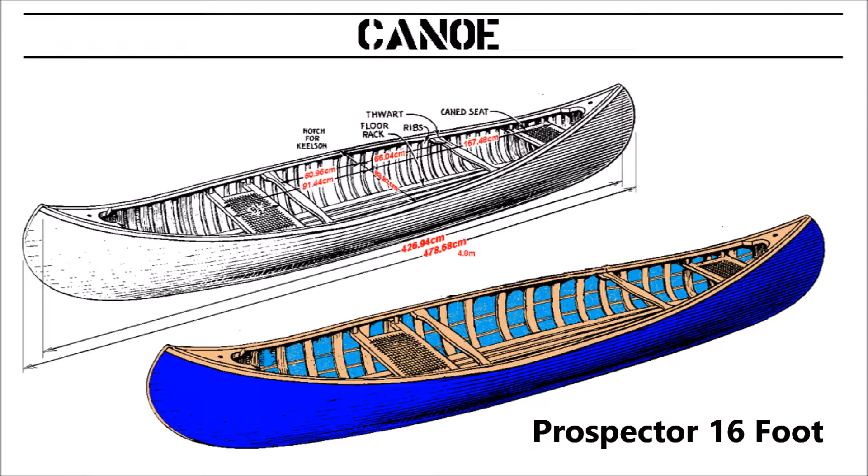So here we can see a drawing of the style of canoe I'll be building. It is known as a prospector style canoe, 16 foot long, and there are various types of canoe that you can build, and this is known as a skin on frame canoe, which means that a fabric is stretched over a wooden frame to form the hull.

So in building a canoe like this, the first thing that we need to be concerned with is the mould on which we build the canoe. And the canoe is built upside down on this mould, and we can see in this picture here a diagram of what a canoe mould looks like.

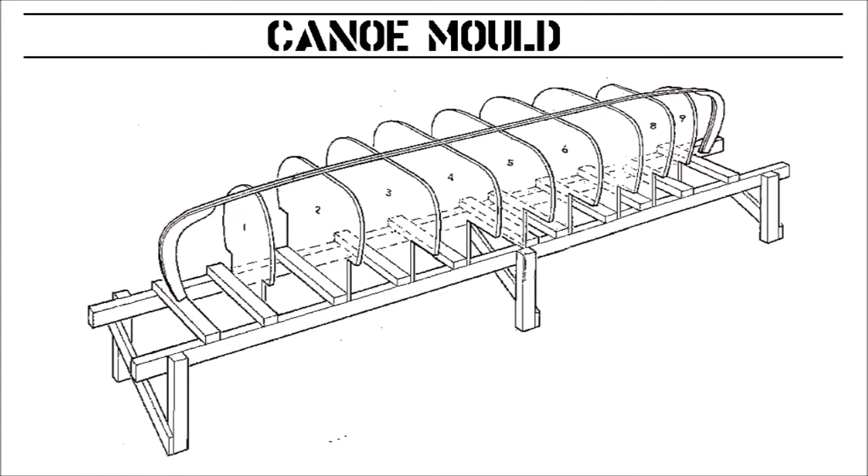If we take the stand that the mould sits on away, the most basic form of mould used to build a canoe looks just like this. The base of the mould is a long flat plank which we call a strongback, and this forms the straight rigid spine of the mould.

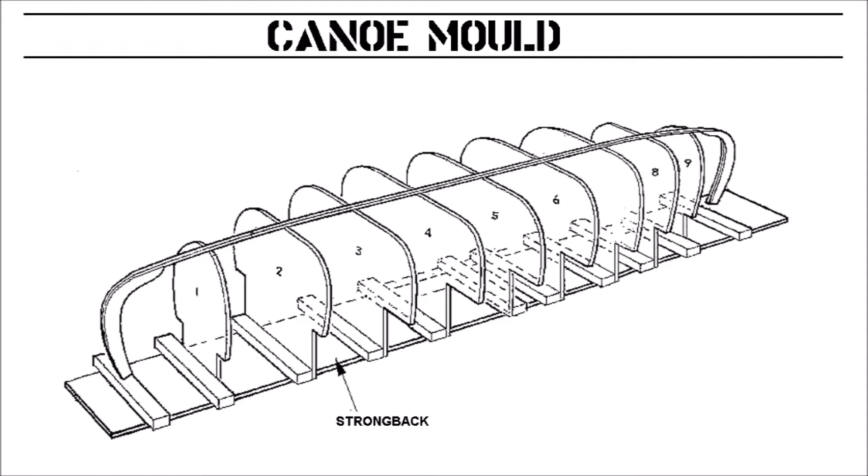The next important part of the mould is what is known as the forms or stations, and they are a number of upright flat boards which form the shape of the hull. The first part of the actual canoe itself is the stem, and this is a curved board, usually made out of plywood, which forms the shape of the stern and the bow of the hull at each extreme end.

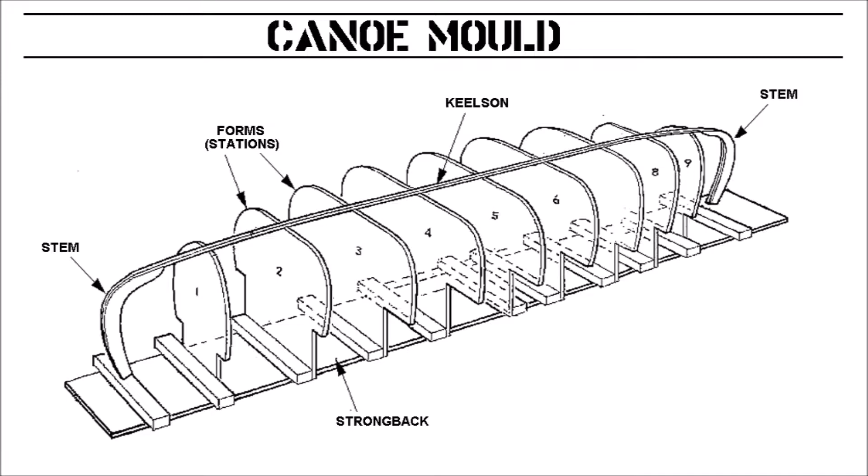Running down the center of the underneath side of the hull is a long straight piece of timber known as the keel or keelson, and the two stems are attached to this piece of timber. Next, stretching from stem to stem, curving around the outside shape of the hull, are a number of thin strips of wood which we know as stringers, and the stringers are fastened to the form stations in order to hold them in place and keep their shape.

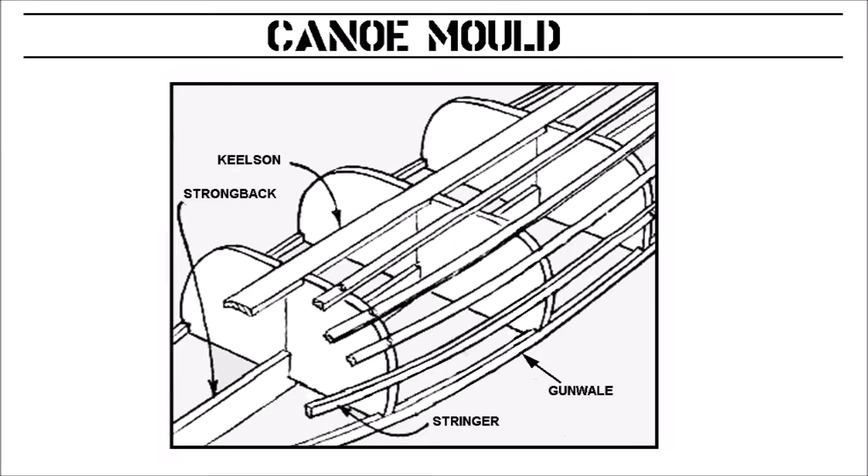Here we have a sort of a cutaway view of what the stringers look like as they are wrapped around the form stations to form the basic framework of the hull, which the fabric will be stretched over as the last step of constructing the canoe. At the bottom of the row of stringers down each side is another piece of timber which is thicker than the stringers, and it is known as the gunwale.

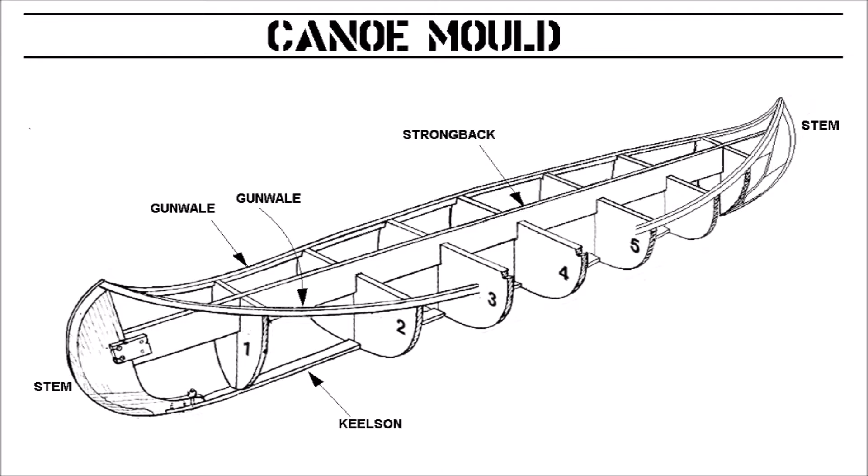Now if we look at this diagram, it shows us the mould flipped right way up, and this diagram is slightly different than the first one that I used because it's from the original plans for the prospector canoe that I will make. And the first thing you might notice here is that the strongback on this design of mould is not a long flat horizontal board, it's a long flat vertically placed board that the form stations slot onto. And with the mould turned right way up like this, we can now see more clearly where the gunwales are and the stems at each end.

So when we're considering different plans that we might use as the basis for building a canoe, the most important part of those plans are the patterns for the form stations, because the form stations are what give the boat its unique shape and form, and if we only have the form station patterns, we can pretty much piece together everything else that we need in order to build a canoe. But if the form station plans are not there, then pretty much we can't build the canoe.

In the case of the canoe that I'm building, the patterns for the form stations are drawn out on a grid which is made up of inch squares.

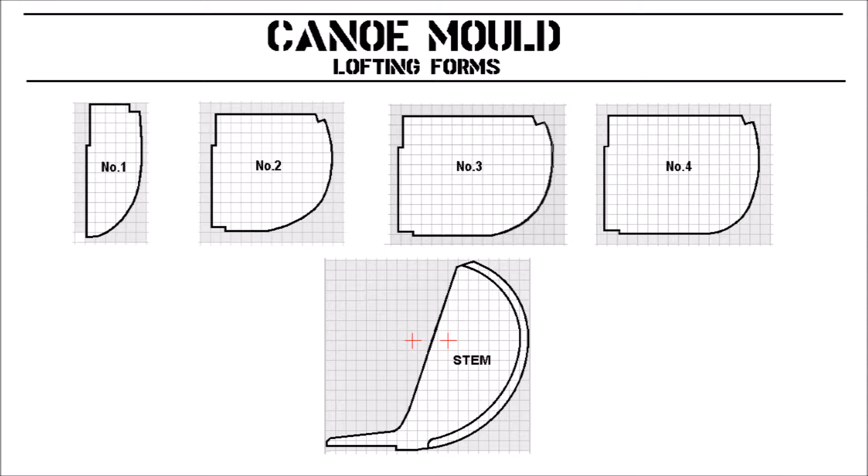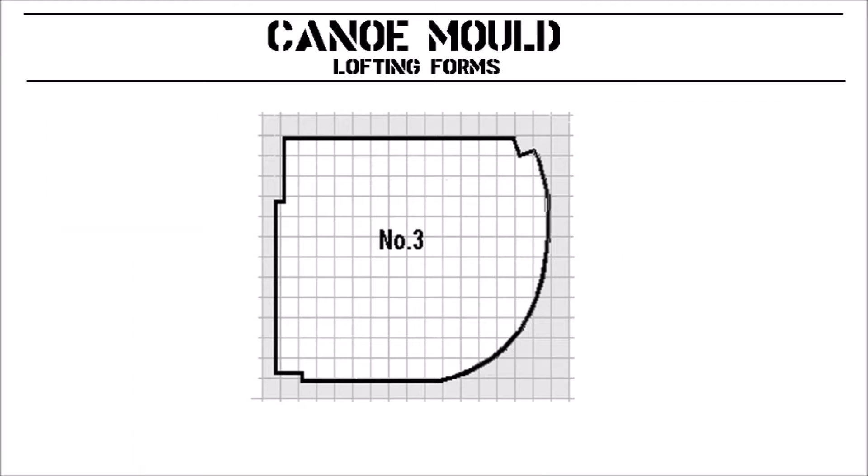To understand how we make the form stations, let's have a look at form station number 3 and its pattern here in this diagram. So we take a sheet of paper and we draw out a 1 inch square grid. Looking at this pattern, we can count how many squares down, how many squares wide, and then we reproduce the pattern of this side of the number 3 form station on that gridded square pattern.

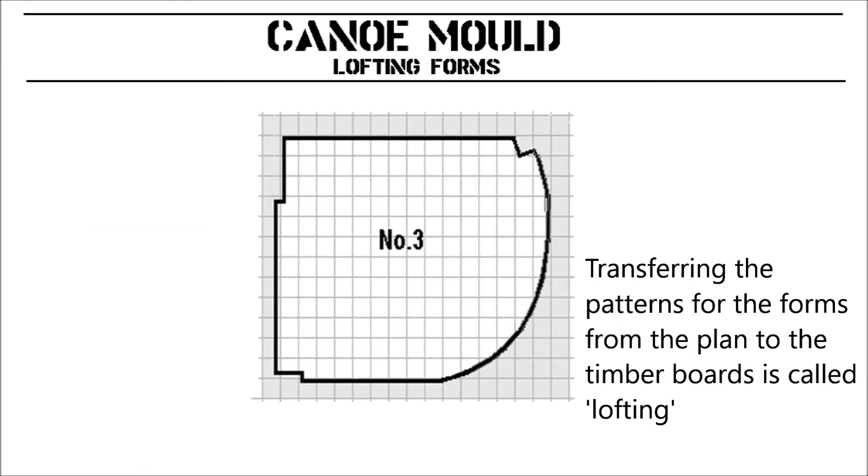So each form is made up of 2 mirror image parts, just like this. So we repeat the number 3 pattern twice when we draw it out on our plywood that we're going to cut out to make our number 3 form station.

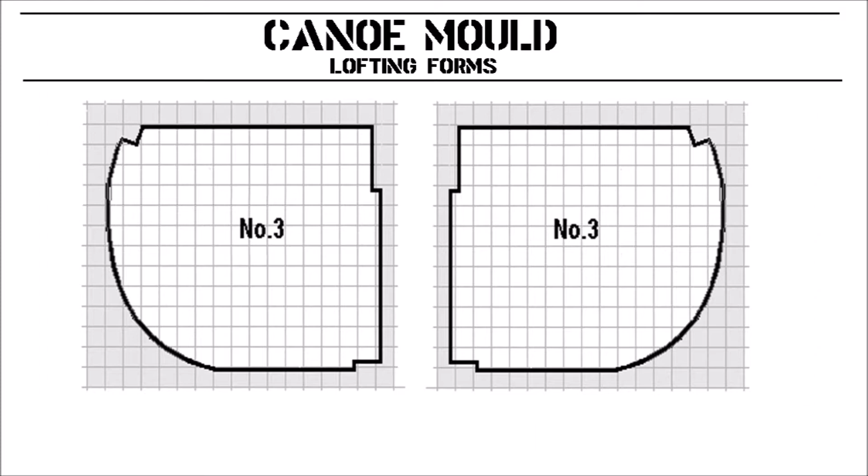And then these 2 sides, mirror images of the number 3 pattern, are bolted together with what is called a cleat, and we can see in this diagram here what that completed number 3 form station looks like.

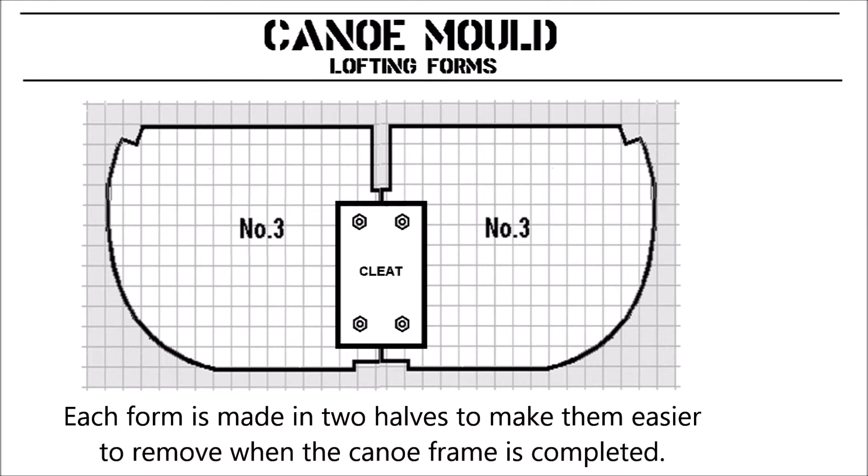Because the canoe is symmetrical side to side and end to end, we need to make 2 of these number 3 form stations, which means that we need to cut out 4 number 3 sides. We join 2 together to make the front number 3 form, and we join 2 together to make the back number 3 form. And in the case of this particular canoe, that means we will have 7 forms altogether, and the very middle form we only make 1 of.

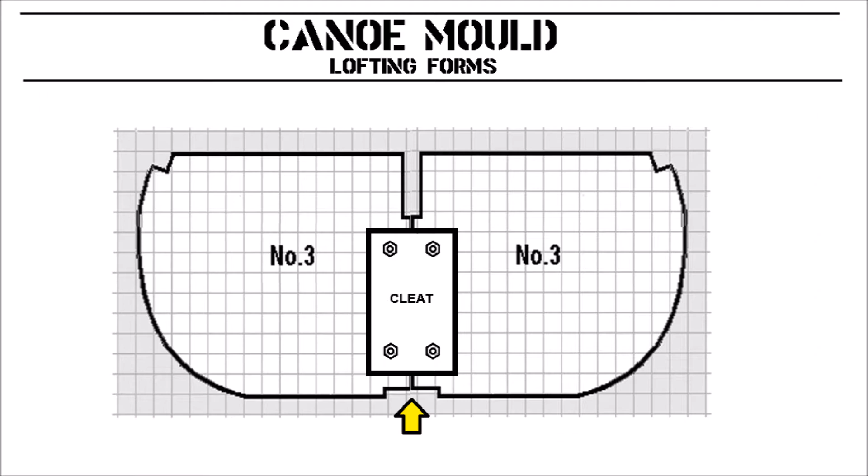So this little arrow here shows us where the strongback will slot into the form on the particular mould method I will be using. And the keelson slots into this gap here at the bottom. These 2 side notches are where the gunnels slot in.

So that's all the basic terminology that you need in order to understand what on earth I'm talking about in the coming videos when you see me actually building this canoe, this 16-foot Prospector skin-on-frame canoe. So I hope that's some help.